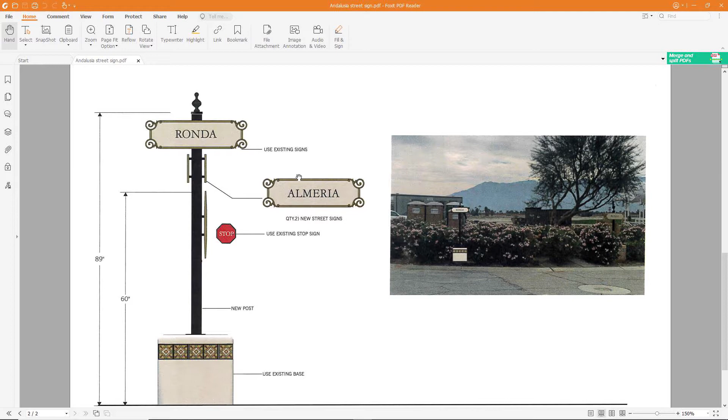All right, so Andalusia street sign retrofit, customizing, whatever. Normally a sign like this, you guys have done it, wouldn't really warrant a video, but there's a couple things I want to clarify from the work order and the files, how we're actually going to make it.

So lay of the land, you're just going to get two more street signs that you're adding, and that comes with the little guys there. You're going to be making a new pole, new post, new parts for that just to have it. But I know there's a bucket somewhere with these, so just to replace. And then I know that we also have more of these, but let's not use up what we have and go down to zero on hand.

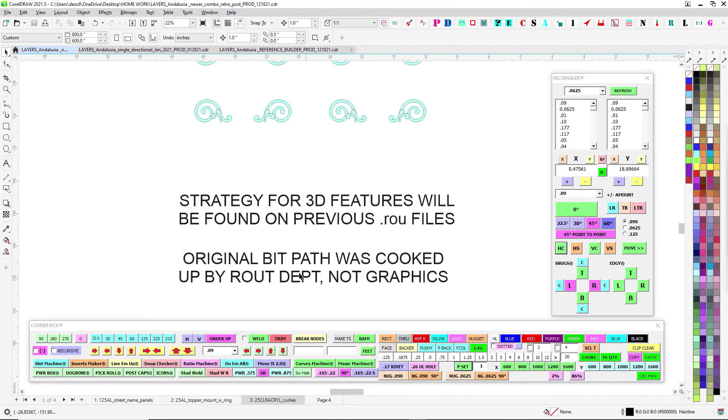Let's go ahead and rout some more and make sure that we're keeping up, because these are ancient relics from a bygone era. And like it says here, these were cooked up by rout, so I don't have any way of reproducing these. So if we lose the rout file, or if we lose an actual one we can hold and use for an example, then we might be out of luck.

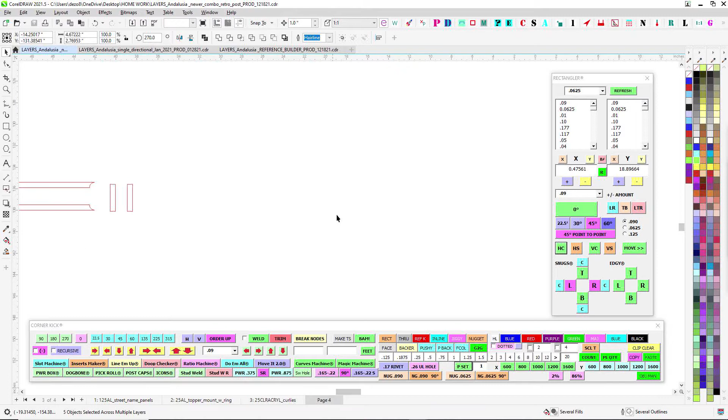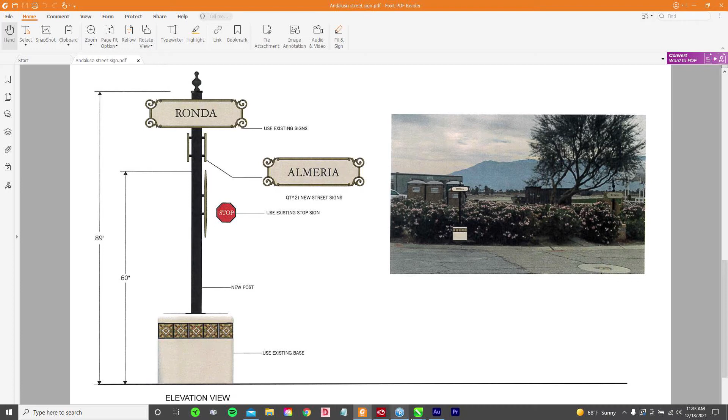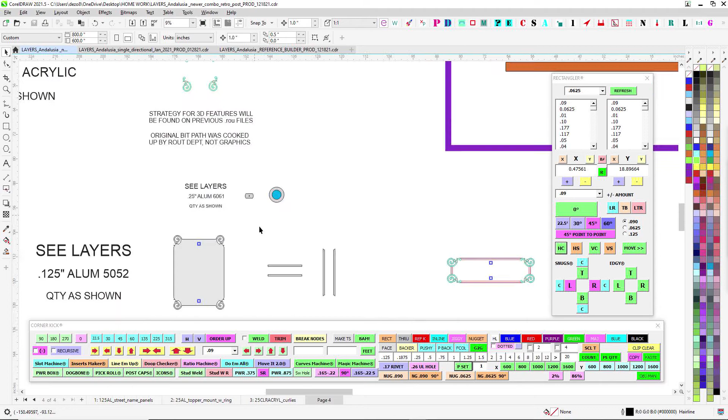Edgar, go ahead and chop it up. And you know where these guys are here, you're just going to weld those down about a half inch. That's a 5/16 tap, if you remember. Remember, it's that little jig that helps you weld those in if you want. Remember, it's in those buckets up there.

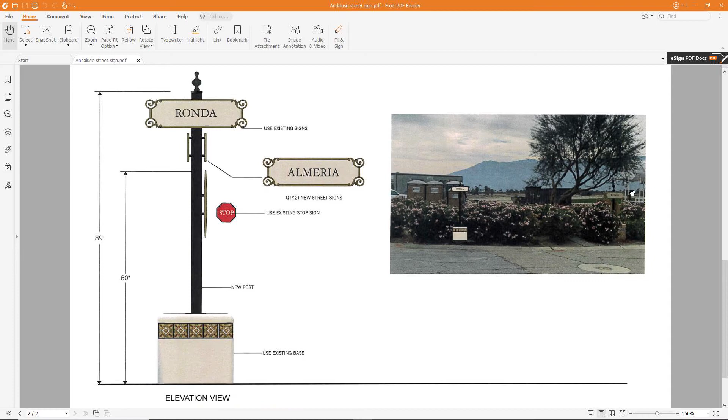And then what you're going to do is wait for this to come back. They're going to bring back the existing, I guess, which is over here. This guy here, this is the donor. So you'll have a topper again, and you'll have a stop sign, and you'll have these two rondas.

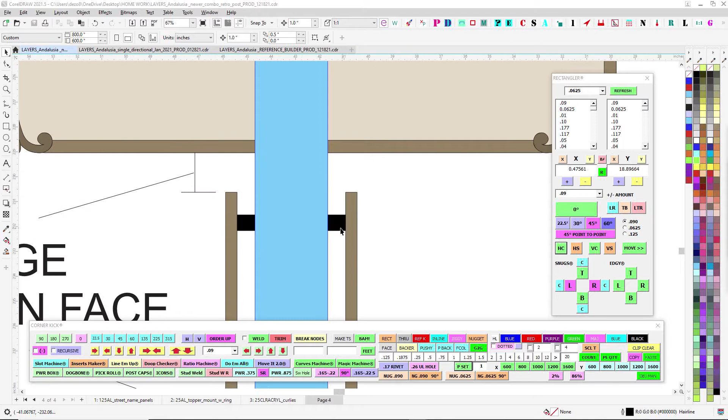So what you're going to want to do though is make sure that when you cut these, so these are 1x1 square tube, and I think they're like 1.25 inches long. So you can measure when it gets back, you can measure that distance. Not that big a deal, but I think it's like 1.25 inches. But when you slice this off, it's going to be shortened.

And you also, when you go to weld this, you want to make sure it's nice and clean, because it's hard to get the gun in there, and it's important to get a nice clean weld. Otherwise these will come off, and then we're out of luck.

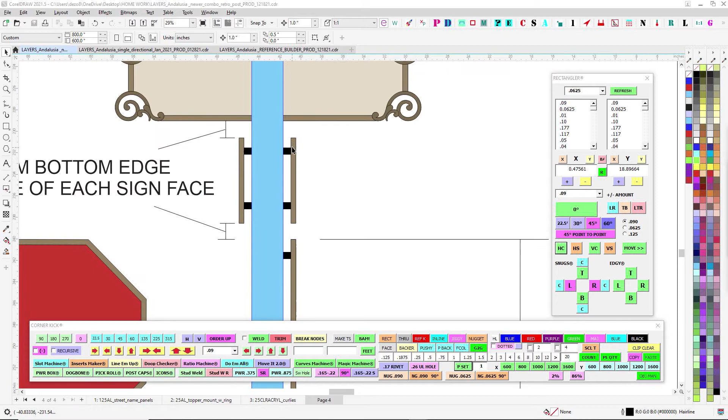So when you go to cut the rondas off and you cut the stop sign off, just go ahead and cut this in the middle, or cut it more towards this side. And then what I suggest you do is go ahead and take the time to grind these smooth and reattach a new nugget. That way you have fresh aluminum post and fresh nugget.

And then take the time to grind the paint off the back, clear it all the way down so you get a nice clean weld and you're not breathing burnt paint. As well as I would go ahead and grind the paint off the front as well, because when you go to weld on this thing, the aluminum will go molten, and then the paint smoke will come through and contaminate your weld. So you want to make sure that's clean.

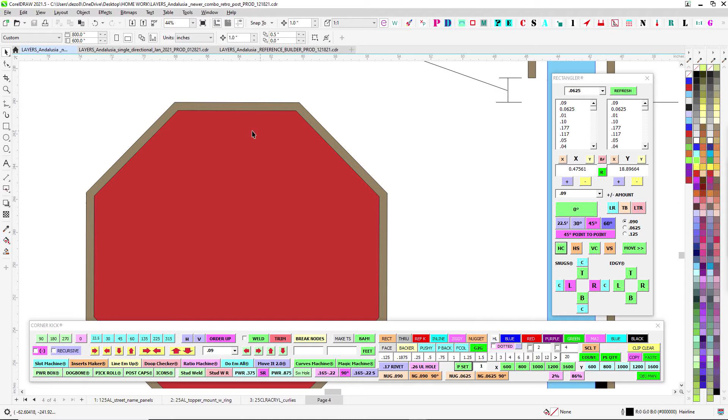I think these are double face, so I don't know if you can do that on this one. Just do the best you can. But I would definitely grind around there real good, clean it up, get it down to raw aluminum, and then re-weld on your nuggets. That way you have a nice, fresh, clean weld as best you can. So anyway, because all these are going to have to get repainted anyway, and they're going to all have to get redone, I would suggest doing that.

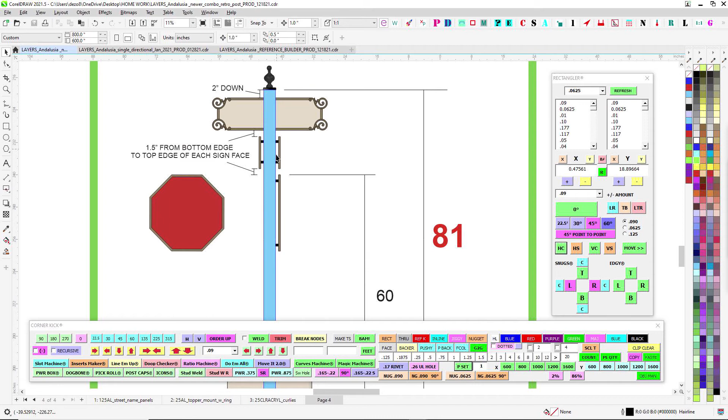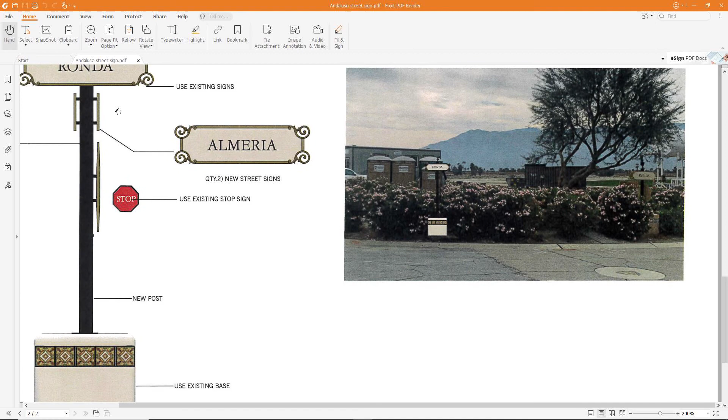It's 2 inches down from there, and it's 1.5 inches in between each of these. And just make sure, pay attention. You're making the stop sign follow the same plane as the new signs, I guess. That's on the work order there. So just follow that, that's kind of how they have it. So anyway, it's a combination of make sure you follow the work order, but don't follow the work order, follow this here. So it's this one here.

So anyway, 24 on the ground. So I think that's it. So a couple of pro tips, but you know what to do on these bad boys. So anyway, good luck.